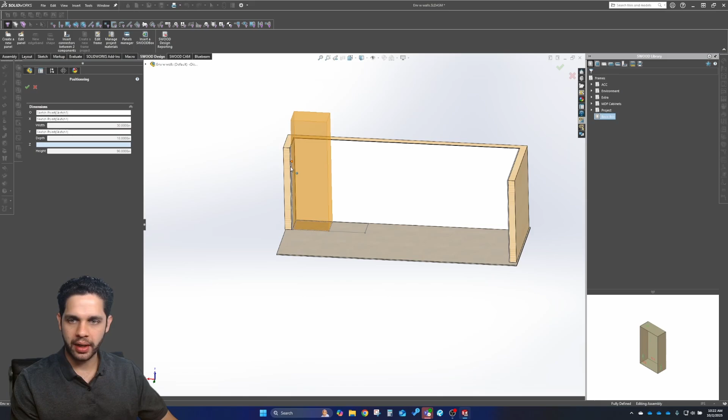Over here on my right side, I'm in my SWOOD Frame Library, and I just have this basic box. I'm going to drop that into my assembly. Right click on it, insert copy, drop it where I want it, and hit select. So my box is in there.

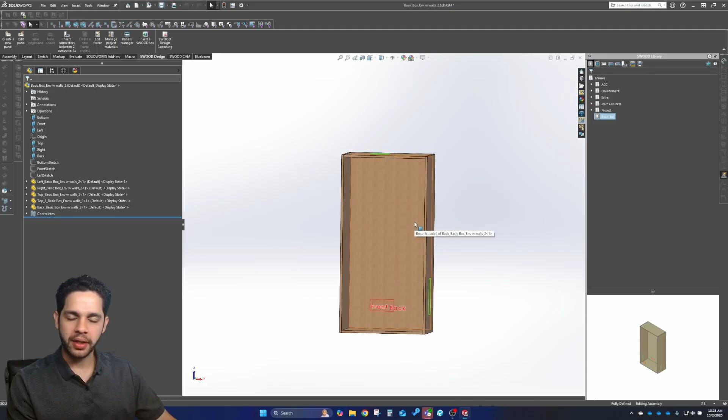Very basic box. I want to make some edits to this because the design parameters call for it. I'll open up this assembly by itself, and here is my frame. I want to remove the back because this is just a standard back panel with no connectors. I also want to add connectors on all four sides where these cabinets interact. And then I'm going to add some adjustable shelves and some edge banding.

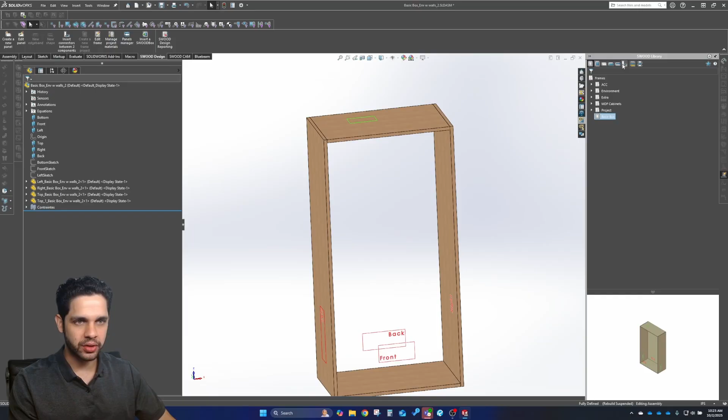So to do that, I'll delete. I'm deleting this back. I'm going to add my connectors in, so I'll jump over to my connectors library. I'll insert connectors and start importing those, making sure they come out in the right orientation. That one looks good, that one looks good. This one needs to be flipped, and this one also needs to be flipped.

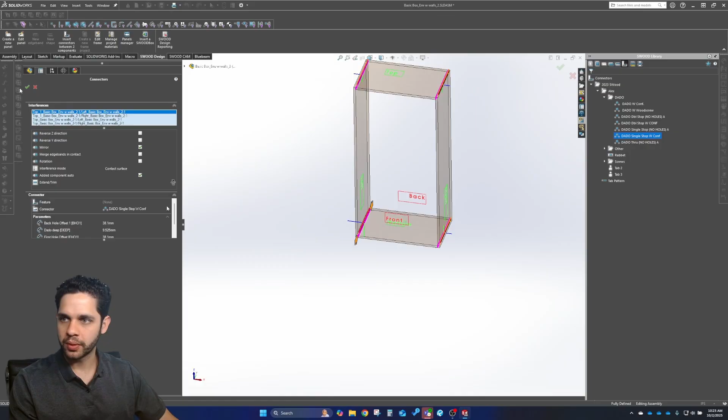There we go, so we'll hit check, check again, just to make sure everything is looking correct. I basically just have a stop dado connector with some Confirmat screw machining. So my connectors are all in there.

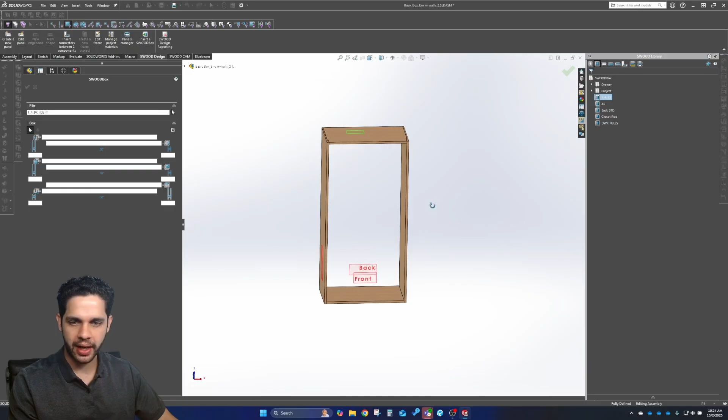I'll jump over to my SWOOD box library, and I have a back already created, so I'll drop that into my frame. Okie dokie, frame is looking good. Maybe for this height, I'm going to add an additional stretcher, so I'm editing my SWOOD box to do that. So now I have 4 stretchers there.

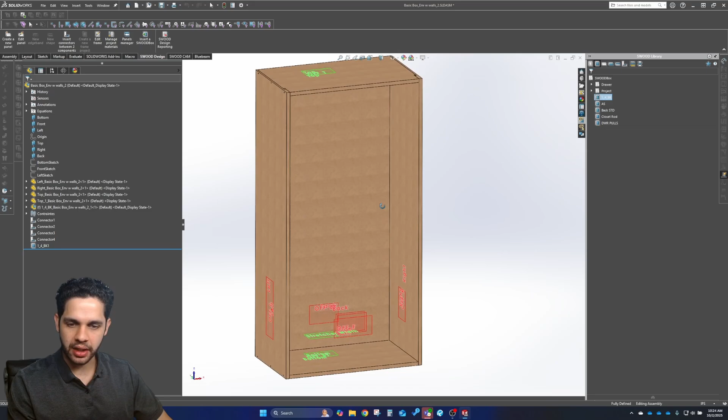I want to add some adjustable shelves, so I also have a SWOOD box for that. I'll insert that. I think 4 looks good here. I don't want the adjustable shelves in line with my frame itself, I want that held back by 1 inch, so I'll add 1 inch for that setback.

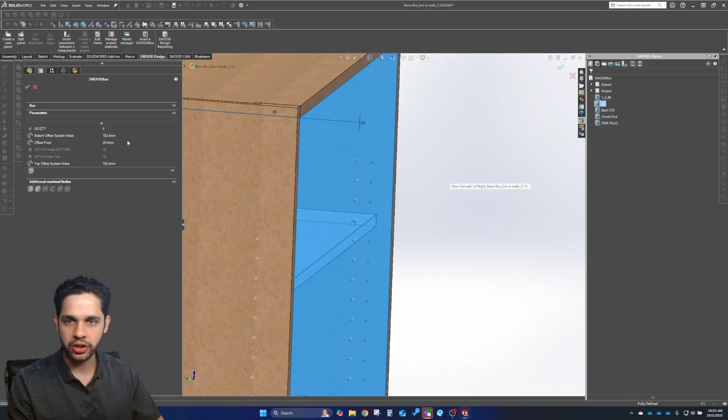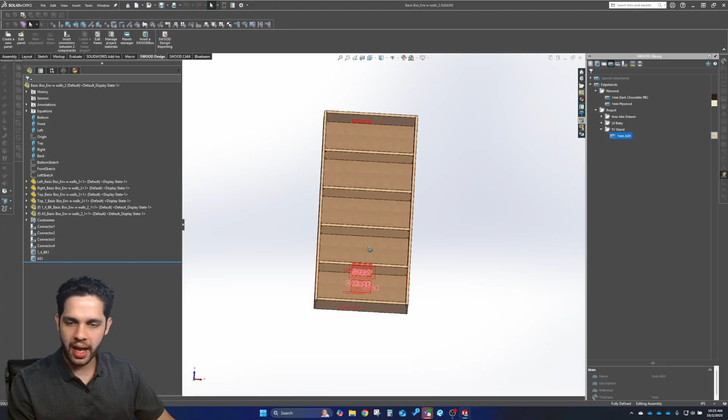Perfect, and now the only thing that I'm missing is my edge banding. I have edge banding already preset on my adjustable shelves, and those are the same type I want to use. So I'm going to jump over to my edge band library and start dragging that on here, and I have that selected, so I'll start adding that edge banding on all 4 sides. Confirm that. All right, so this box is now completed.

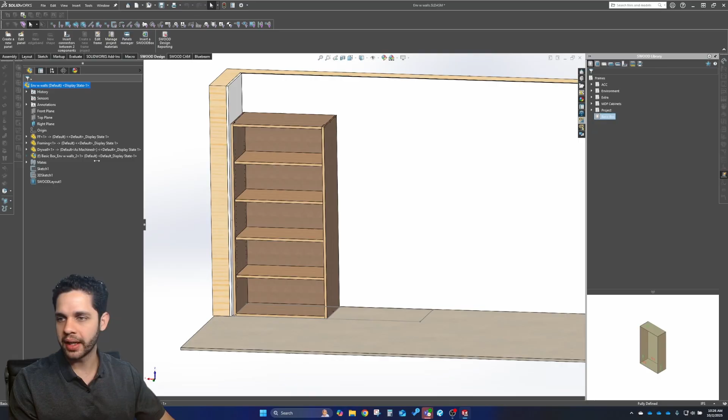Okay, so let's say I want to create the exact same style of box right next to it. But in my SWOOD Frame library, I only have my default basic box. We could change that. A common mistake that I see, people are like, oh yeah, I've heard about this new SWOOD feature where you can drag your assembly and add it to your SWOOD Frame library. And they go to click on the SWOOD frame, go to drop it in, and it's like, hey, this isn't allowing me to drop it in.

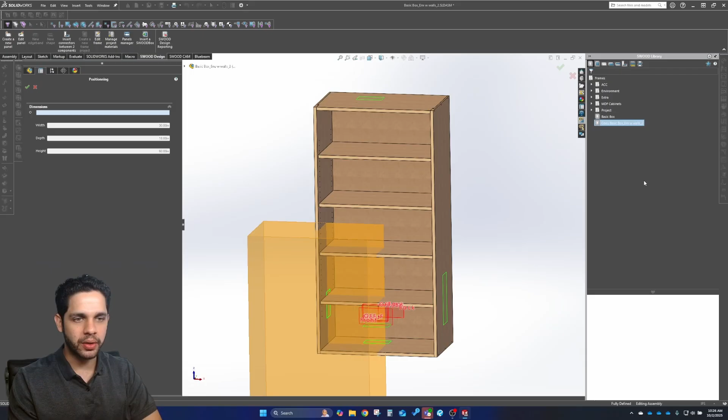Here's the catch. You have to open that assembly by itself, so open subassembly in position. Now that we're in our sub-assembly folder, I can drag this into my frame library and it's going to create a copy. So you want to immediately rename this copy. So what we'll do -- oh, sorry, pressed the wrong button there.

Oh no. This may or may not work, but we'll go ahead and rename the assembly. Let's go ahead and call it, let's call it lower, and then we'll call it box, or lower cab. That works.

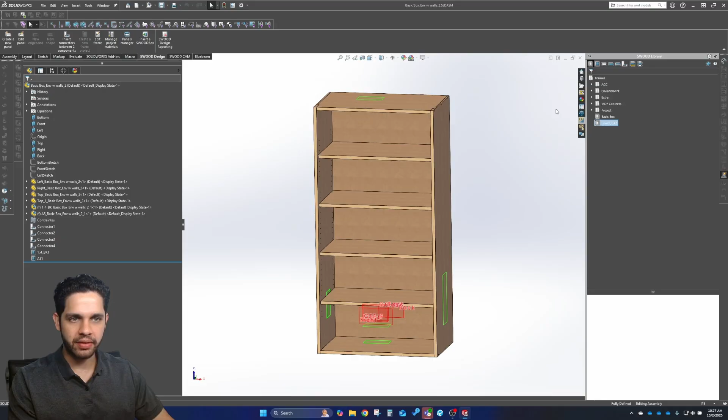So now I have that saved in my library here. I'll jump out, and I'm going to edit this panel just to make sure those changes took effect. As you can see, now that I renamed that frame in the library, the string has now changed. So it's now left copy basic box environment with walls underscore lower underscore cab. That is the string of text I want to make sure is there and propagate it to all the parts in my assembly, which it is.

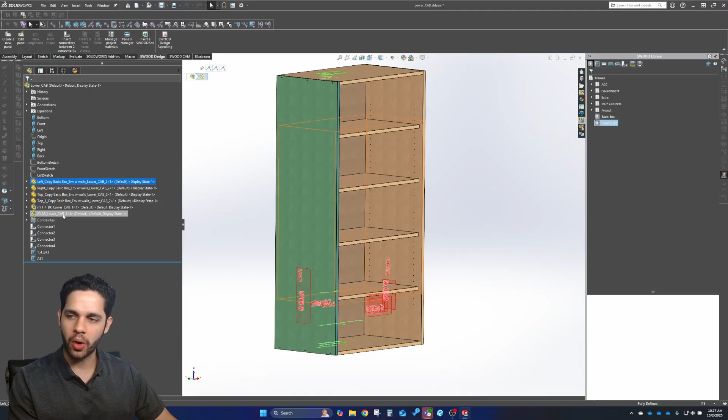I recommend keeping the file names or file paths a little bit shorter by renaming all of these. You can keep it pretty generic, like left side, right side, top, bottom, back -- change the names to the parts inside these sub-assemblies. But just for this example right now, I'm not going to worry about doing that.

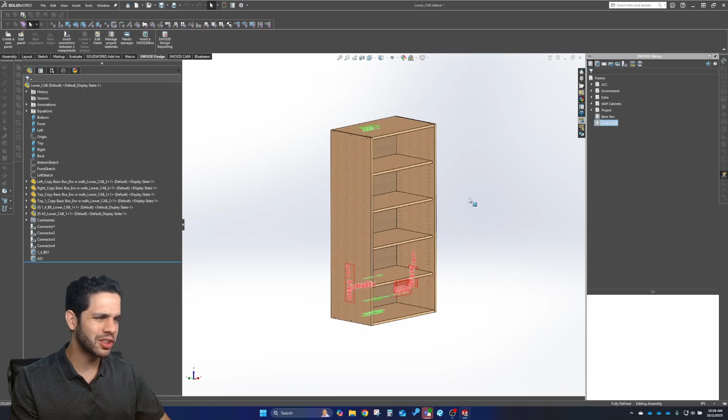I just want to show you guys the speed at which you can create a copy and re-enter it into your assembly. So I went ahead and created that. Now I have this lower cab SWOOD frame added to my library, so I can insert a copy here and drop this bad boy in. And instead of making this the taller cab, I'm going to make this a little bit shorter. I believe this is set to 60 inches and this one's 30.

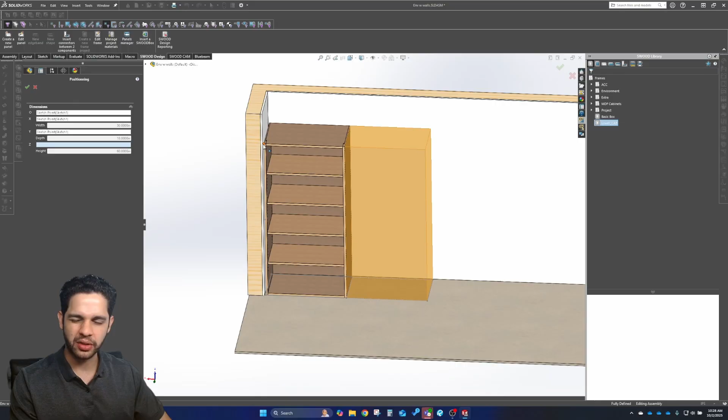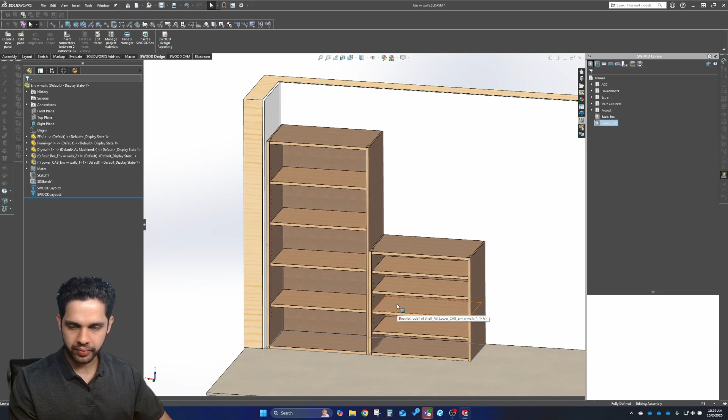So I'll make it 30 inches. I know my proportions are going to come out a little strange with these adjustable shelves. But as you can see, the new frame that I created is the same material, has the same connectors, the same machining. It's basically a complete copy of this guy here that I can now drop in, and it's added to my SWOOD Frame library as so.